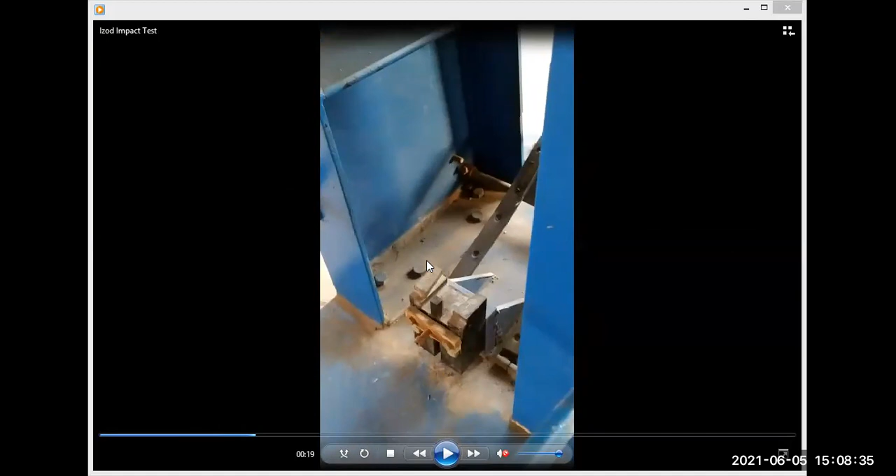This is the position of the trigger itself, and this is the vice. This portion is defined as the vice itself, meant for carrying the load. What we have, you see, is a block-shaped item which is screwed at the bottom of the machine, and we have one vertical rod here, and there is a horizontal clamping block which is fixed by means of an Allen key bolt here.

And this particular item is our test piece for the Izod testing machine. It is fixed here on the machine in a vertical way, and a particular punch is fixed on the swinging weight. One is meant for Izod and another is meant for Charpy.

Here for the Izod, there is another important point. I hope you can remember, there is a notch on the particular workpiece. This notch, although not visible here, is kept just here. The notch is provided on the work in order to ensure easy and quick breakage of the test piece. In the Izod test the notch faces the punch, whereas in the Charpy test it will be on the opposite side of the punch. The punch will come from this side and strike the workpiece, it breaks, and it swings back here. And the portion of the rod shown here is the brake.

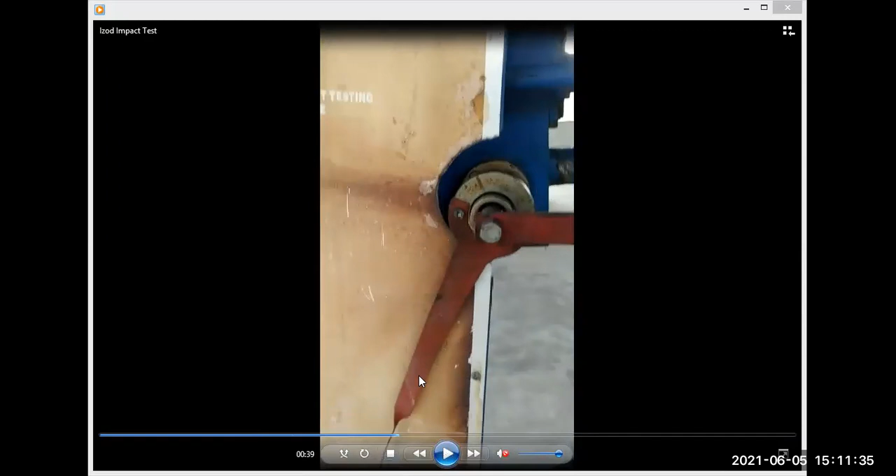Okay. Next, this is the punch, and this is the Izod testing. Before Izod testing, the setup we have done over the graduated scale is here. We put the pointer on the 162 degree marking, and you see, along with the punch, this trigger actuating punch is moved up a certain distance, and it is parallel to the swinging punch. So it is also at an angle of 85 degrees from the machine body, and it will be exactly parallel before it starts swinging, and it will swing with the punch and come and strike the work.

On the other hand, the striking punch strikes the work, breaks it and moves up, and along with it this trigger will move the indicator up to the position the punch moves up, equal to the upward movement of the punch. It will move up to the extent to which the punch goes up after swinging. Thus, the amount of energy required is readily available to us. It's shown here, not very clearly visible, but it's shown.

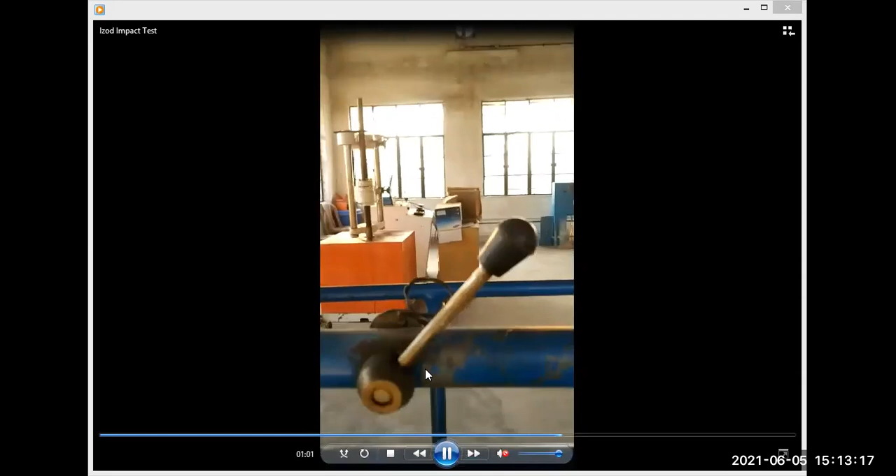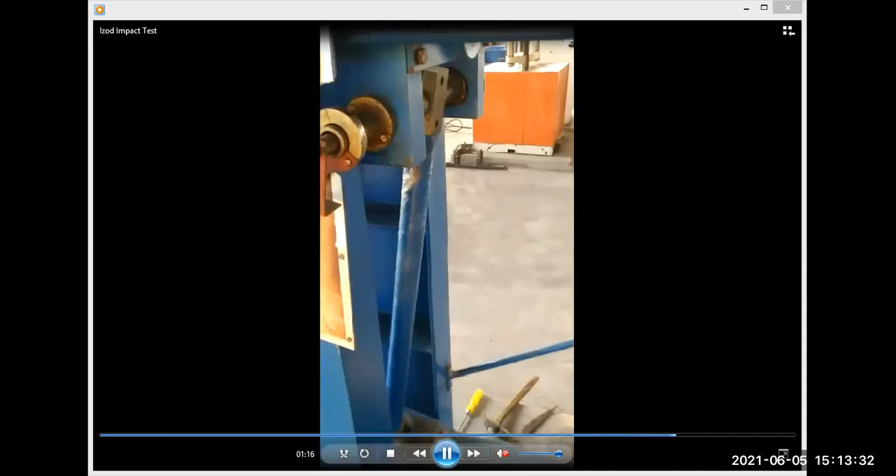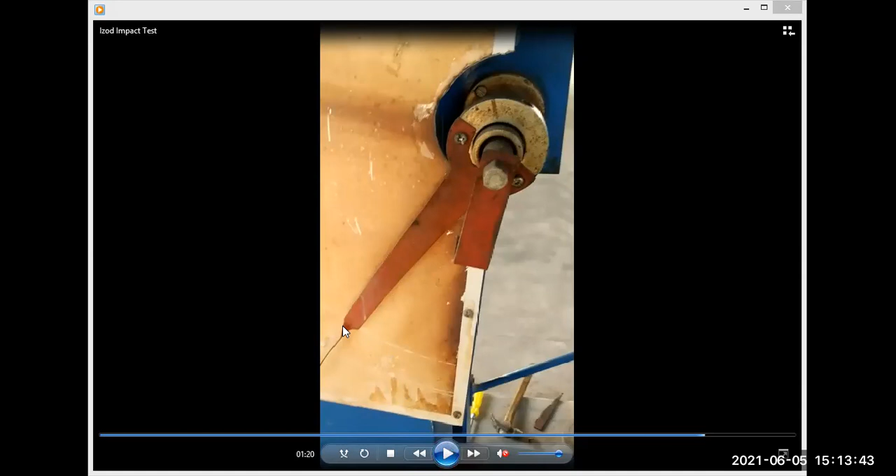Next, this is the rod for actuating the punch. I am actuating the rod and releasing the punch. The punch moved and struck the workpiece, and as it could not break the workpiece to the full extent, it moved up to this position only. So we can safely say almost 140 joules of resistance was required, and even that was not sufficient to break it. But if we break it, it generally goes up to say 90 or 80 joules. Means around 80 joules of energy is required to break the piece in the Izod testing machine.

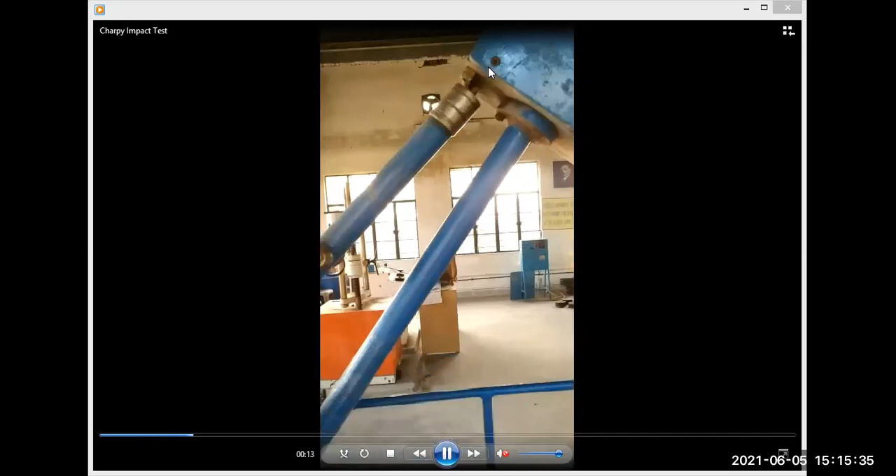This is the Charpy test. Here we have opened the front plate which I have shown earlier, moved the whole punch up and fixed it over this fixing rod, in the same manner as we did in the Izod test. Here a separate type of punch is required and is fixed here in order to ensure the punching of the load.

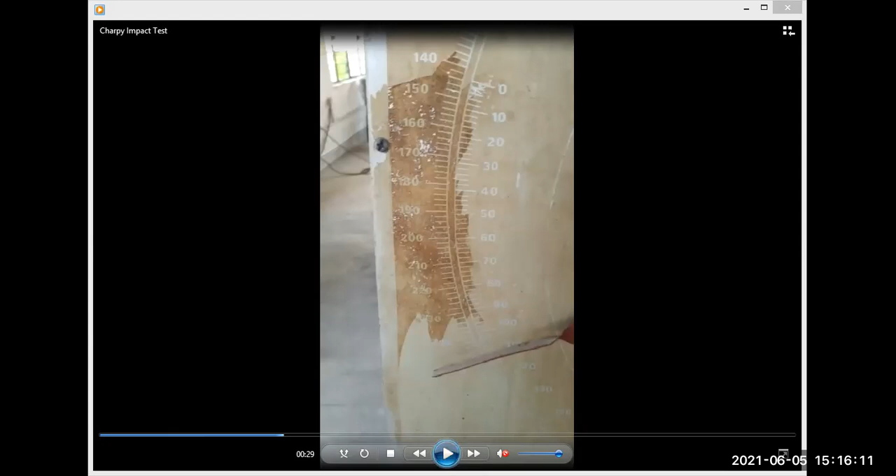Next, here we have to set the dial. The initial point of the Charpy load is here. So we have to keep it at that position before starting the punch. So I am putting it here. That is 150, 164. So this is the amount of swing desired for the punch.

So this is the 164 graduation where I am testing here, which means if there is no workpiece, after striking, the punch has nothing to strike, it will swing to the back a total of 164 degrees. Then it tries to come back to the original position and slowly and gradually reduces its swing.

But as we are placing our workpiece in its passage of swinging, it will first break it and then swing, and it will not be able to go to the end of this graduated scale. It will stop somewhere in between, which shows that from 0 up to that position is the energy required for breaking. Let us see.

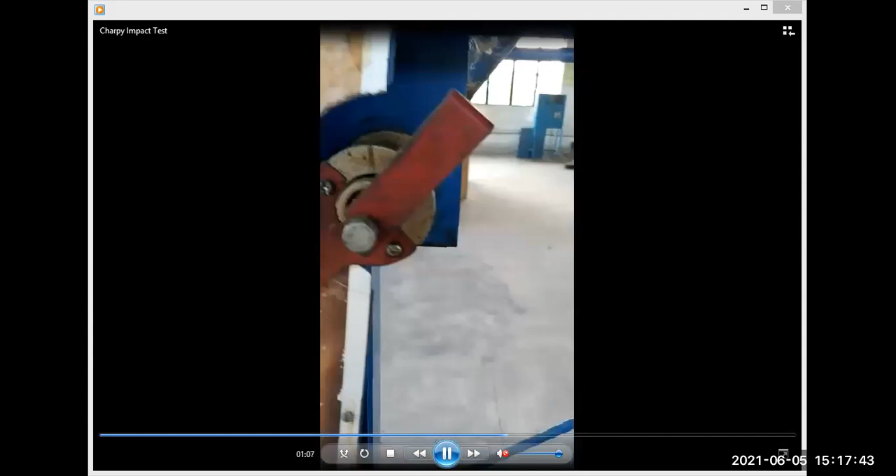Same scale is there. Izod is also visible. You see here the trigger or the driver of the indicating arm is at par with the shaft carrying the swinging load itself. It will swing along with the shaft in the same line, and it will go up. But it cannot go up like the punch itself. It will go in front and stay there where the punch starts swinging back. It cannot swing back like the punch because it is fixed. It has no independent movement like the punch itself.

Here, what you see, this is the vice. That vice is again viewable. This is comparatively better shown here. This is a V block. It is an angular block here, in order to take the huge striking load of the punch itself, and we keep the work over the top of the vice itself.

And you see this notch is visible here. The notch is facing the punch in case of the Charpy testing machine. In the Izod, the workpiece was vertical, but in Charpy it is horizontal. It is the essential difference between Izod and Charpy test. For both Izod and Charpy, the size of the block is the same. It is of 1 centimeter square section, but length is comparatively less.

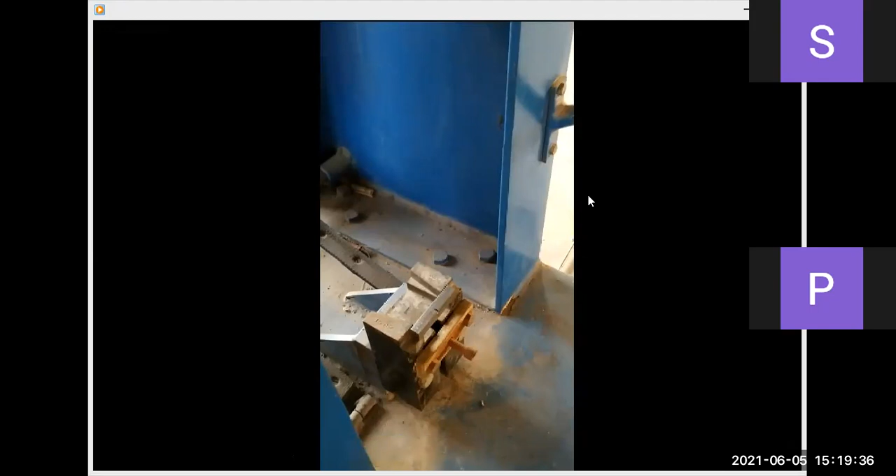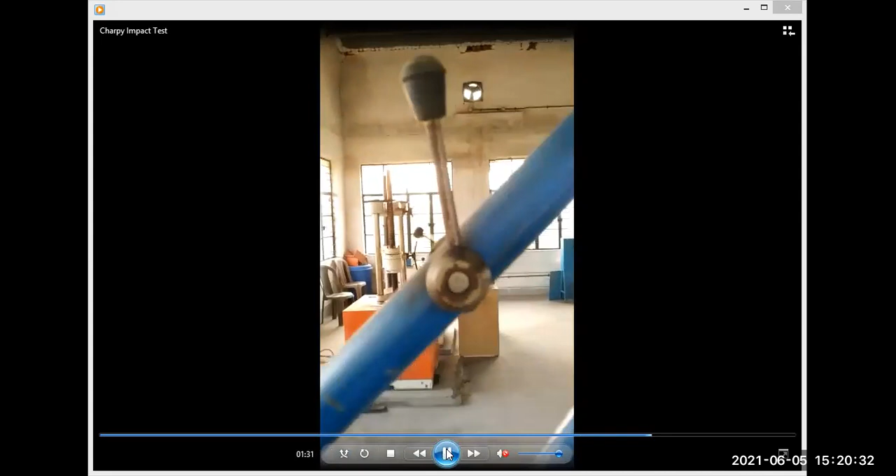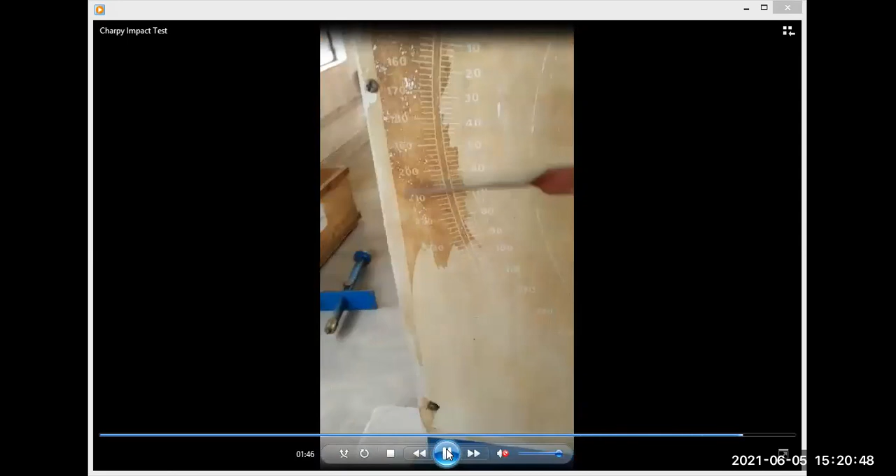Now let us operate. Here is the operating handle. I've touched and moved it clockwise, thus releasing the punch. Here the workpiece is broken, and it goes here. It's around 120 or so. So 120 joules are required to break the material in the Charpy machine.

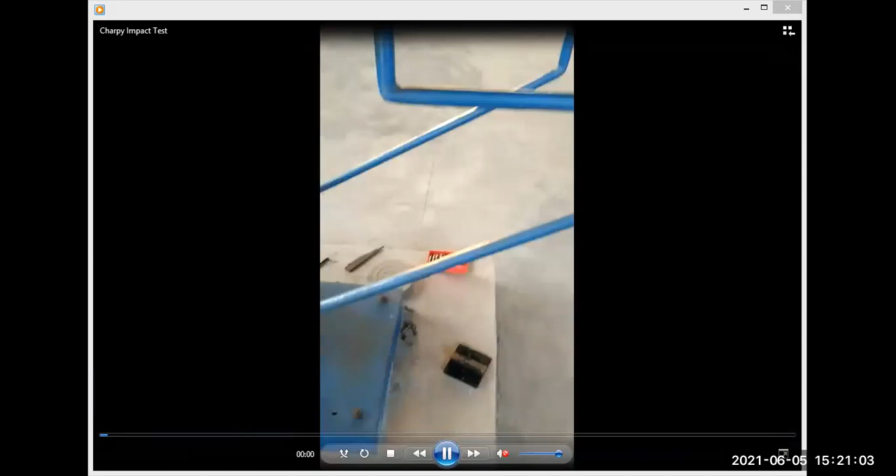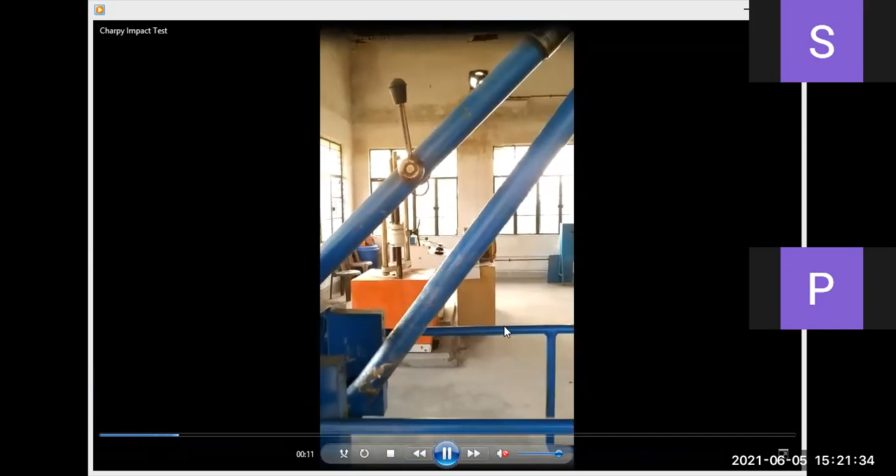Here is the punch shown, but due to darkness I can't focus rightly. This is a portion of the striking block which is fixed here, exclusive for Charpy as well as Izod. Izod has a separate block which we have to open before doing the Charpy operation, and fix it the next time we do Izod. The block is fixed by means of Allen bolts over the punch itself.

Again, the graduated scale I'm showing you is somewhere near 162. I'm showing the initial position. Here I put it in the initial position.

This is the operating lever here. It is parallel to the punch itself, and it will move along with the punch, but when the punch swings back, it cannot swing back. It moves up to the position where the punch goes, moving the trigger, which stays where the operating lever is stopped. The lever cannot go back with the punch. It will remain there unless you operate it manually, like this.

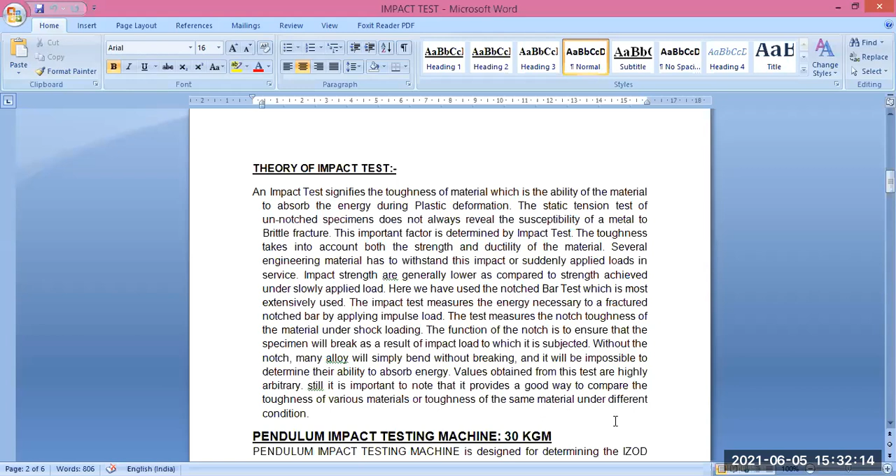Now we have this pendulum testing machine. We have seen a pendulum which is swinging from either 85 degrees or from 164 degrees, which is always away from the test itself.

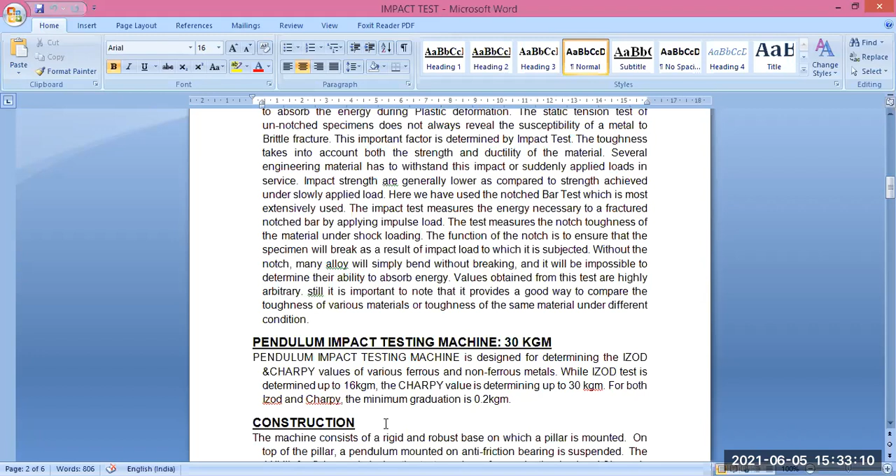This pendulum is designed for determining the Izod and Charpy values, and the Charpy value is determined up to 30 kilogram meter. So for Izod, it is around 16 kg meter, and for Charpy it is around 30 kg meter. For both Izod and Charpy, the minimum graduation is 0.2.

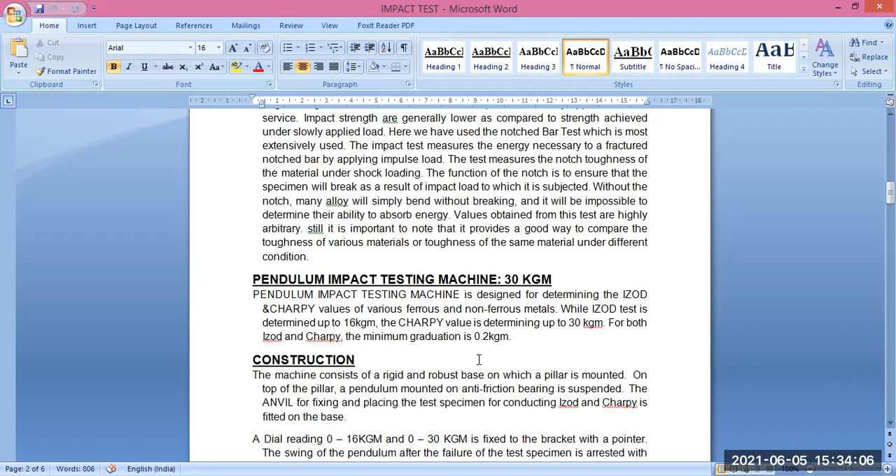Next is the construction of the machine itself. The machine consists of a rigid and robust base on which the pillar is mounted. On the top of the pillar, a pendulum mounted on an anti-friction bearing is suspended. The anvil for fixing and placing the specimens for conducting the tests is fitted on its base. The dial, 0 to 16 kg and 0 to 30 kg, is fixed on the bracket itself.

The pendulum has two starting positions. The upper one, 140, is for Charpy, and the lower one, 85 degrees, is for the Izod test. The angle of release for Charpy is much higher than that of Izod, so it creates a much higher breaking load on the workpiece.

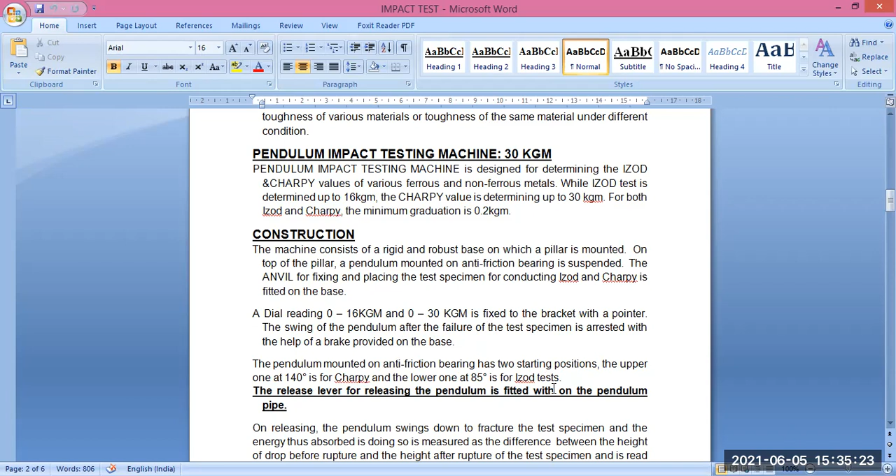Then release the lever of the pendulum. The blade of the pendulum is made to fracture the test specimen, and on releasing the pendulum, it fractures the specimen. The energy thus absorbed, from the difference between the height of drop before the rupture and the height after rupture of the specimen, is read directly from the position of the dial indicator.

Next, the operation of the machine.

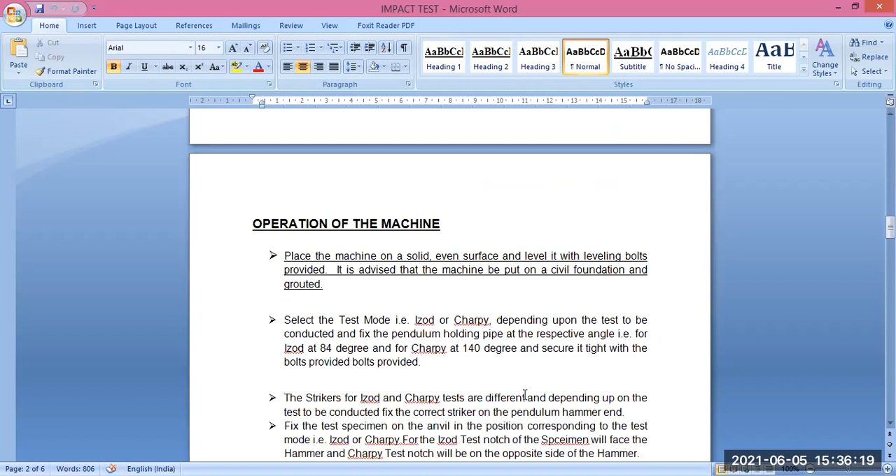Just 1 second, please.

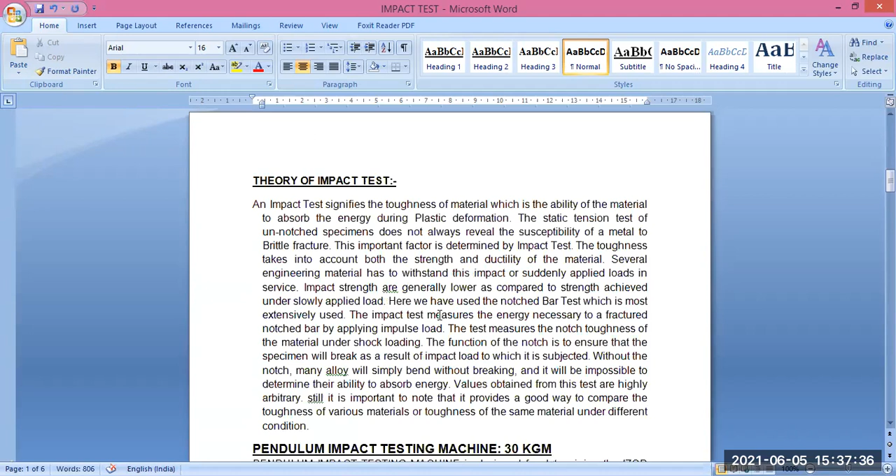Now, let us consider the machine itself again. The machine consists of a rigid, robust base on which a pillar is mounted, and on the top of the pillar, a pendulum mounted on an anti-friction bearing is suspended. The anvil for fixing a test specimen for conducting Izod and Charpy is placed on the base.

I have shown in front of you the vertical pillar of the machine, which has a big robust base because we are creating 16 kg meter as well as 30 kg meter of impact load on the machine by means of the fixing vice. This load is transmitted to the machine base and the machine body. So it should be strong enough to withstand that heavy impact load.

Your part is experiencing the heavy load. At the same time, your machine is also experiencing that heavy impact load. So you have to design and fix the machine so that it can sustain that load of 30 to 35 kg meter or so.

Over the anti-friction bearing, a pendulum is mounted. It is held by a shaft, and a fixed block is attached to it, which swings over the bearing. This is called the punch of the machine.

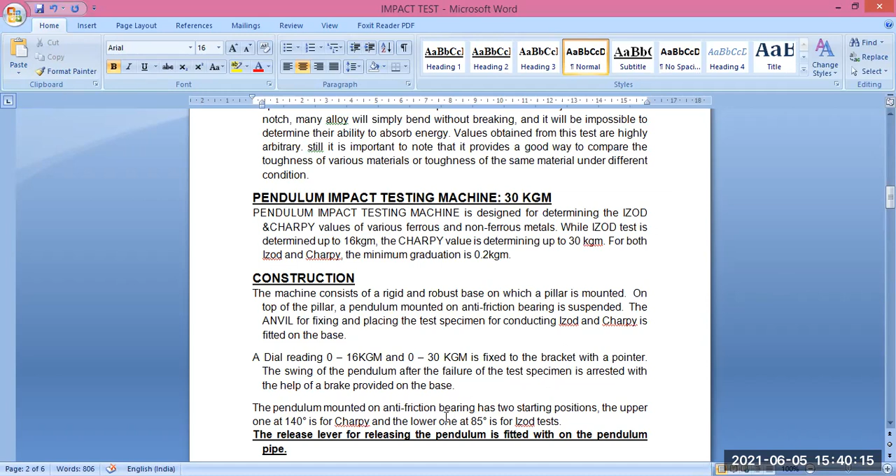This pendulum mounted on the anti-friction bearing has two starting positions. The upper one is 140 for Charpy, and the lower one is 85 for Izod. Two starting positions are there, meaning from where you release the punch. One, as you have seen, the punch is more or less horizontal at a substantial angle, not 90 degrees, but 85 degrees from the axis.

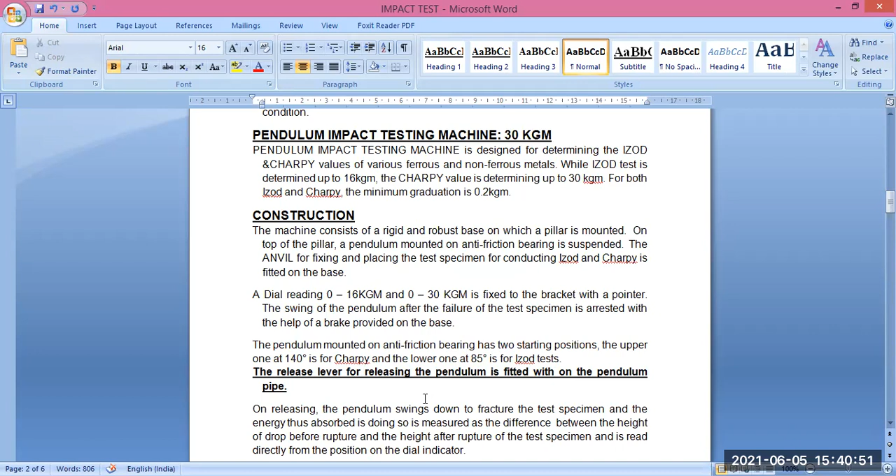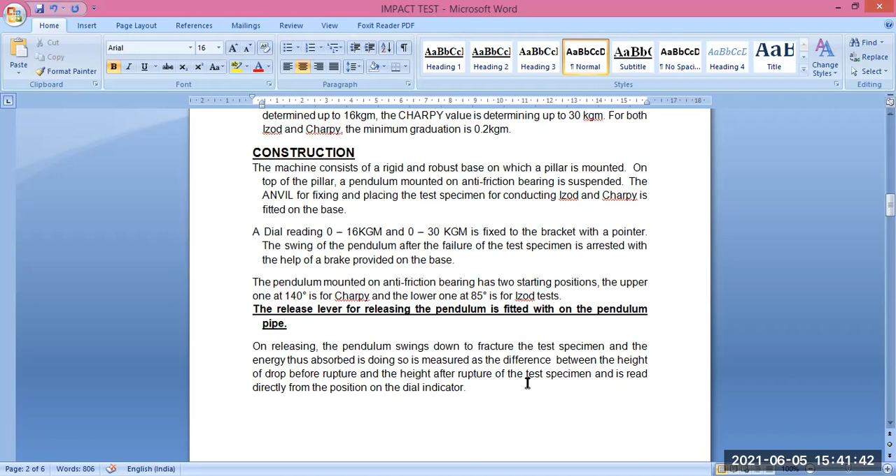First of all, the energy that's absorbed in doing so is measured as the difference from the fracture test, and the energy thus absorbed in doing so is to measure the difference between the height of the drop before the rupture and the height of the drop after the rupture itself. We have this estimate, and this is displayed on the dial of the machine itself.

So what we are going to do in the operation: you place the machine on a solid even surface and level it with the leveling bolts provided. So first you have to keep the machine on a flat surface. We don't require a separate harness for that, but you have to level it properly and keep the leveling rods well inserted in the concrete material itself.

Now, place the machine on a solid even surface and level it with the leveling bolts provided. It is thus ensured that the machine is put on a level civil foundation and grouted. So we have made a civil foundation for holding such a heavy impact machine and grouted it there. So the machine is not moving, and we avoid the initial hassle.

Next, the test mode. There are two types of test modes. One is Izod, another is Charpy. Depending on the test to be conducted, fix the pendulum holding pipe at the respective clamp, then for Izod with 84 degree and Charpy for 140 degree, KGM. The strikers of Izod and Charpy tests are different, and depending on the test to be conducted, the correct striker of the pendulum hammer is to be fixed on the pendulum hammer itself.

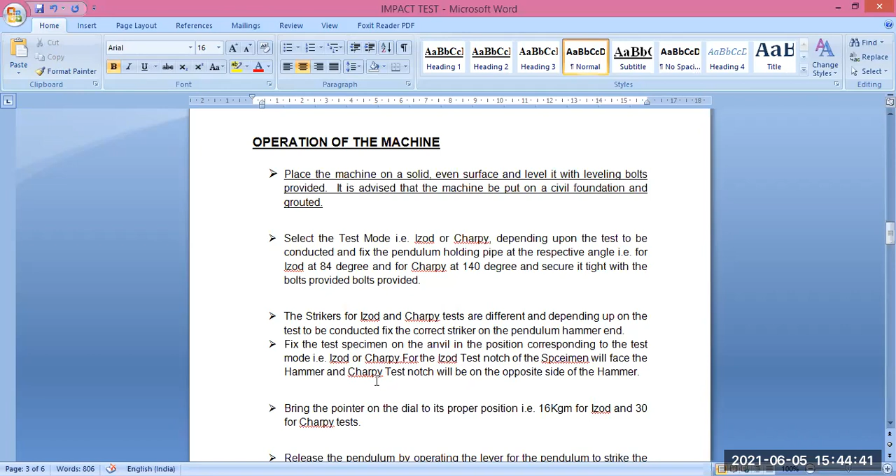Now fix the test specimen on the anvil in the position corresponding to the test mode, and for Izod the notch will face the punch, and the anvil will be placed on the machine itself. Bring the pointer. Now fix the test specimen in the anvil. Bring the position according to the test mode, either Izod or Charpy.

The strikers of Izod and Charpy tests are different. We just told you the strikers for Izod and Charpy are different. There are different types of hardened punches provided, and both are fixed at a time, so that for Charpy we use the Charpy punch, for Izod we use the Izod punch itself. For the Izod test the notch of the specimen will face the hammer, and for the Charpy test the notch will be on the opposite side of the hammer itself.

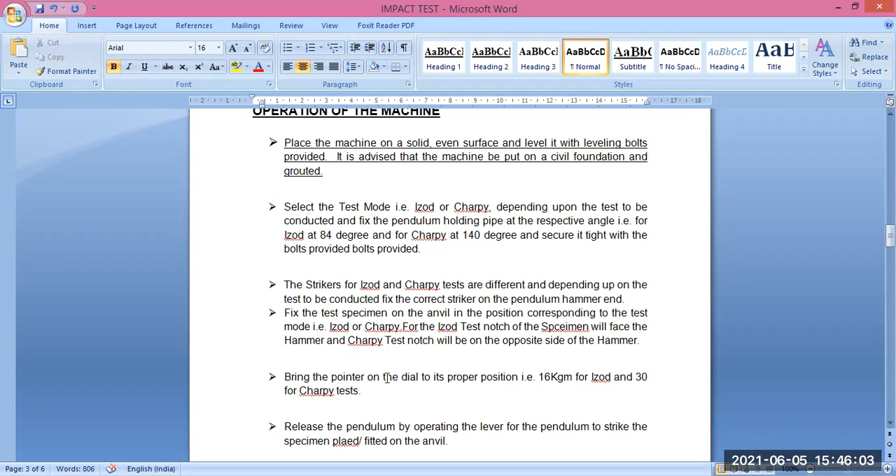So what we are saying: place the test specimen on the anvil, then the striker, and the striker will be bound accordingly. Bring the pointer of the dial to the required position, 16 kg for Izod and 30 kg for the Charpy test. Bring the pointer of the dial to the proper place, that is 16 kg for Izod.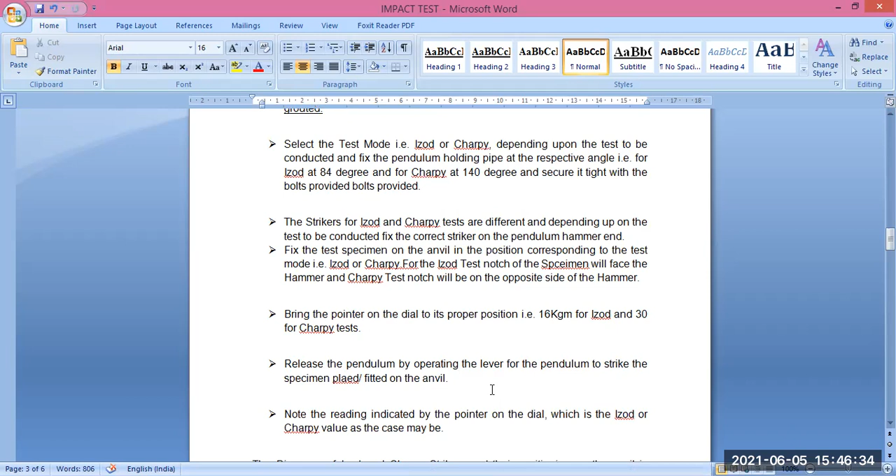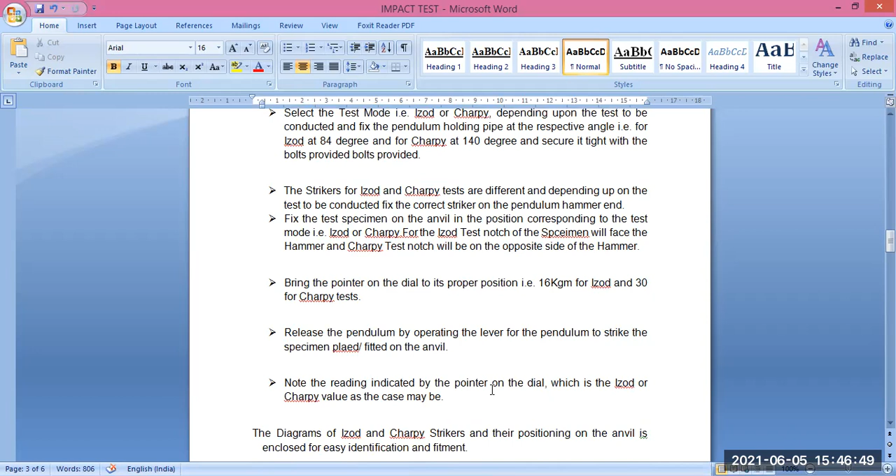Release the pendulum by operating the lever mechanism for the pendulum, so as to set the pendulum lifted. Now, operate the lever for the pendulum to strike the specimen. Note the reading indicated by the pointer, which will be the Izod or Charpy value accordingly. The diagram of the strikers and their positioning on the anvil is enclosed for easy identification.